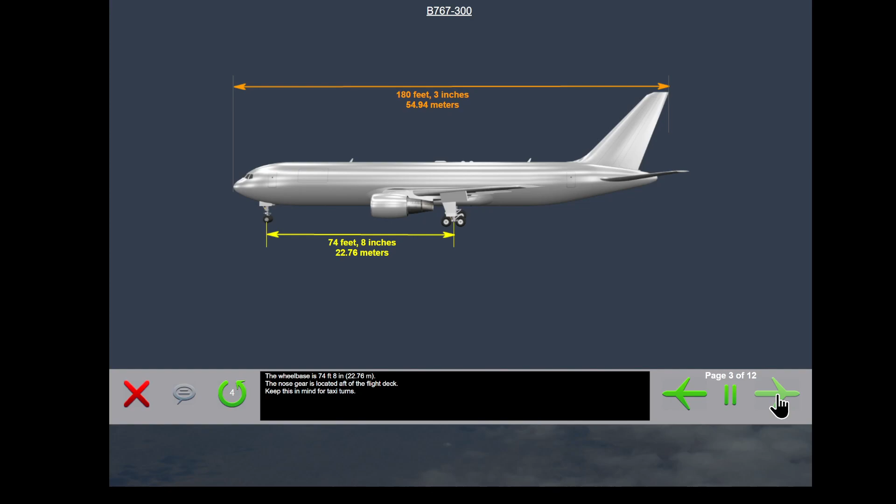In this module, we describe the principal dimensions and turning radius of the Boeing 767-300. The wheelbase is 74 feet 8 inches or 22.76 meters. The nose gear is located aft of the flight deck. Keep this in mind for taxi turns.

The span of the horizontal stabilizer is 61 feet 1 inch or 18.62 meters. The distance from the ground to the top of the vertical stabilizer is 52 feet or 15.85 meters. The distance between the main gear struts is 30 feet 6 inches or 9.30 meters.

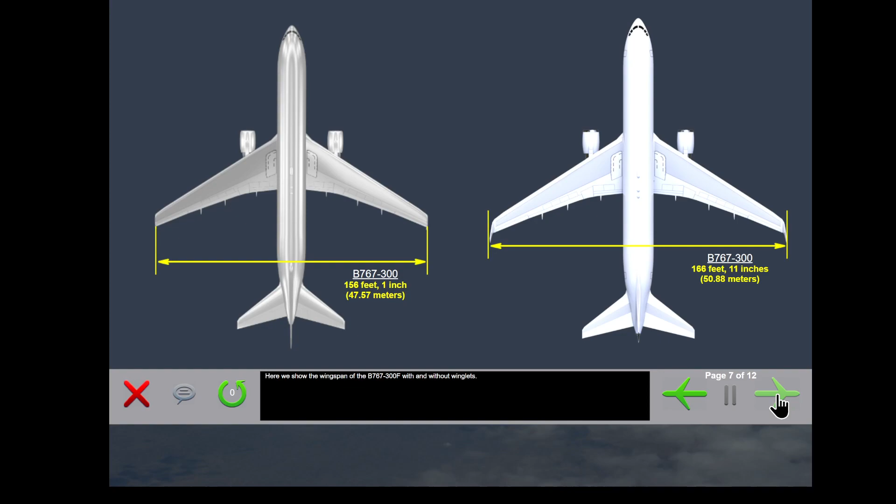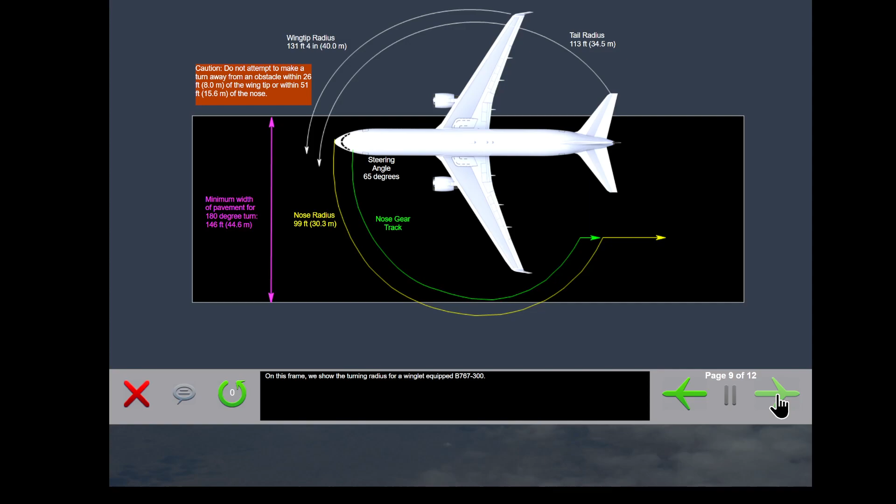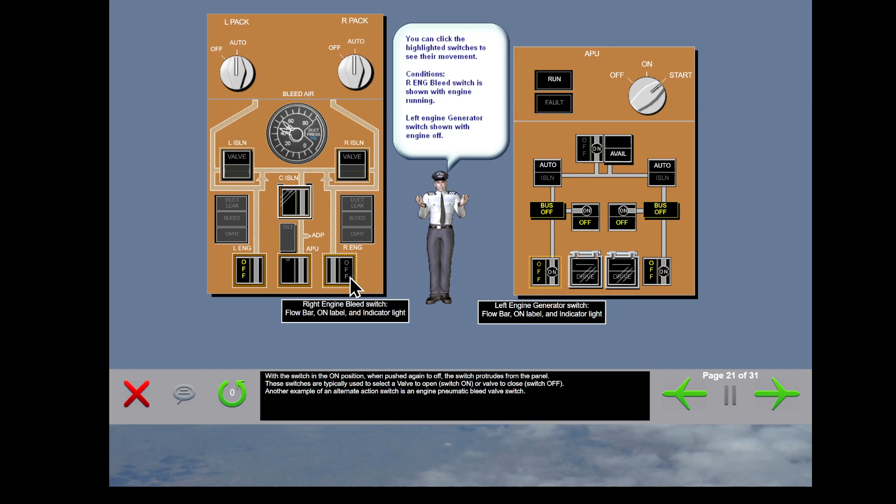Notice that when in the on position, the switch is flush with the panel, an illuminated flow bar is displayed, and the off light remains illuminated until the valve actually opens, with the engine pneumatic pressure opening the valve. Other system alternate action switches have an on designation superimposed on the flow bar associated with the on position. Examples of these kinds of switches are the fuel pump switches.

Finally, other alternate action switches simply indicate on and are not equipped with the shutter and flow bar. An example of that type of switch is an anti-collision light switch. The lower part of the switch contains a line signifying that there is no label for that part of the switch.

This type of switch is spring-loaded to the extended position. When pushed to the on or off position, this switch returns to the extended position. An example of a momentary action switch is the external power switch. We'll explain. The external power switch is currently shown in the off position. The available light merely indicates that external power of the correct voltage and frequency is connected to the airplane, but not currently in use.

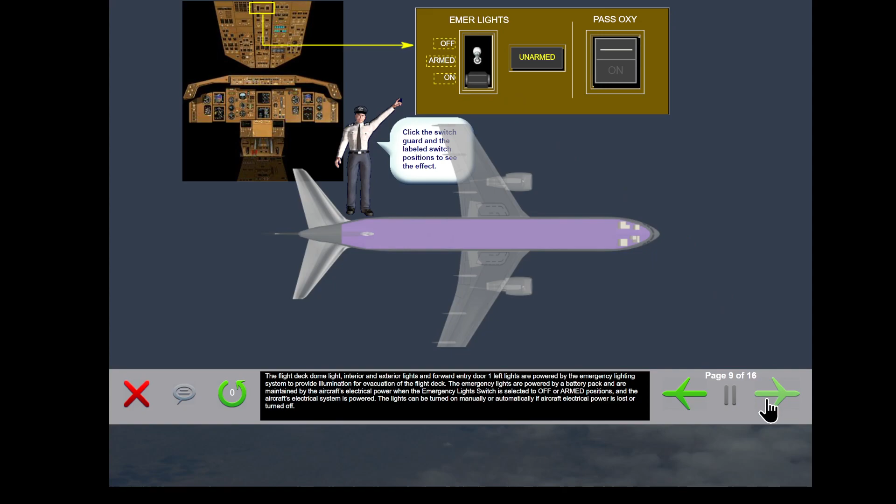With the switch in the armed position, all emergency exit lights illuminate if normal electrical power fails or is turned off. The switch on position activates the lights without any electrical power loss, but turns on the emergency lights unarmed light. A corresponding EICAS advisory message of emergency lights is generated as well. Selecting the switch to off prevents emergency lights operation. Again, the unarmed light illuminates.

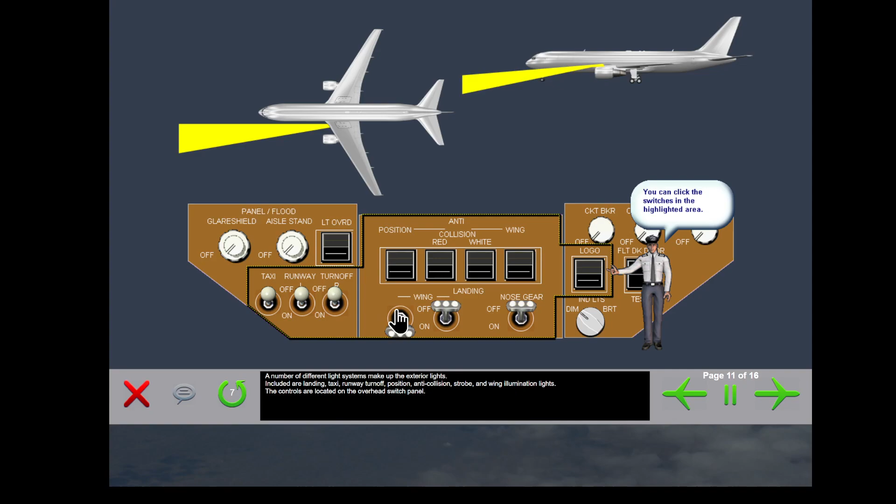A number of different light systems make up the exterior lights. Included are landing, taxi, runway turnoff, position, anti-collision, strobe, and wing illumination lights. The controls are located on the overhead switch panel.

You can turn the lights on and off by use of this free play panel. The wing landing light intensity is at maximum only when the landing gear lever is in the down position. The nose gear landing lights and the taxi lights work only when the nose gear is down and locked.

This module describes the operation of the Boeing 767 cabin doors and emergency exits. All passenger entry doors operate the same. They're manually operated and can be opened from inside or outside of the airplane. The passenger entry doors are plug type and during opening will first move inward and then upward into the ceiling. The doors are counterbalanced, so less effort is necessary than you would expect for operation.

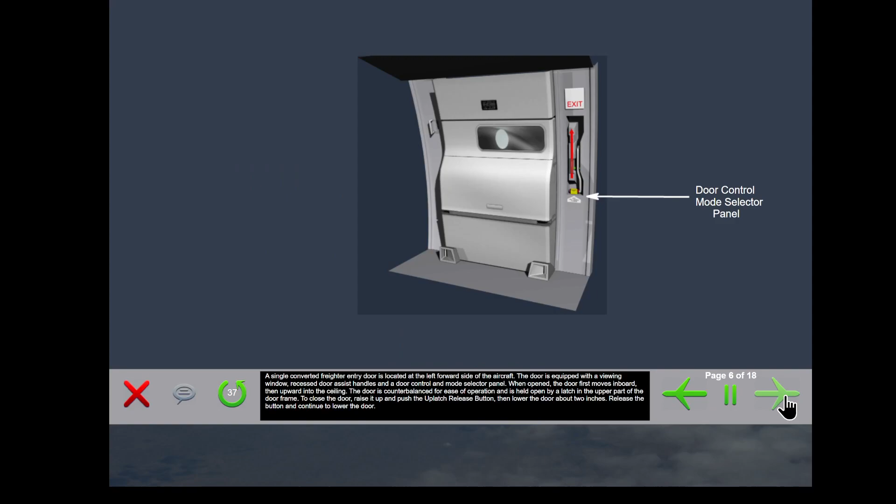A single converted freighter entry door is located at the left forward side of the aircraft. The door is equipped with a viewing window, recessed door assist handles, and a door control and mode selector panel. When opened, the door first moves inboard, then upward into the ceiling. The door is counterbalanced for ease of operation and is held open by a latch in the upper part of the door frame. To close the door, raise it up and push the uplatch release button, then lower the door about 2 inches. Release the button and continue to lower the door.

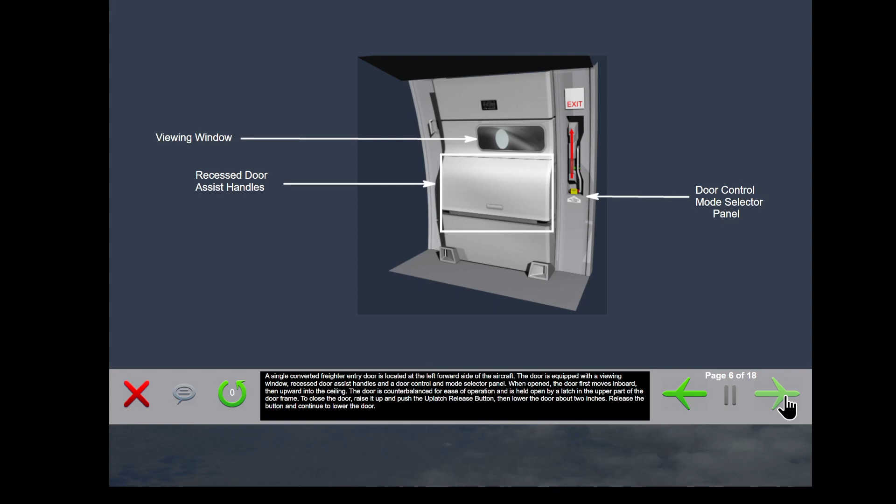We now show the door controls and will demonstrate the operation of normal door opening from the inside. Here you can see that the door is armed for emergency operation, so we must disarm it before opening, or the slide will automatically deploy and inflate. You can determine a door is armed by observing the yellow armed indicators, the position of the slide arming lever, and the displayed emergency-only armed indicator.

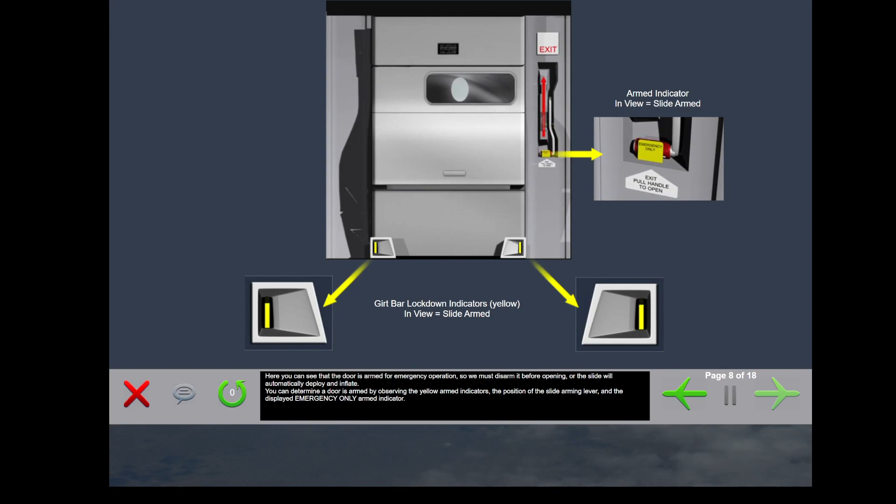The converted cargo freighter door is not equipped with a slide raft. An escape rope, installed over the center portion of the upper door frame, provides a means of egress from the main deck cargo area. The escape rope is used in the same way as the flight deck window emergency egress system.

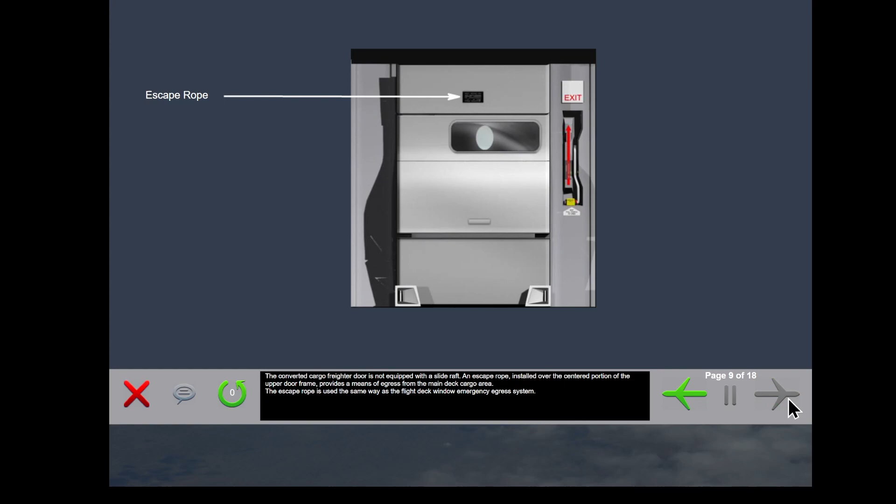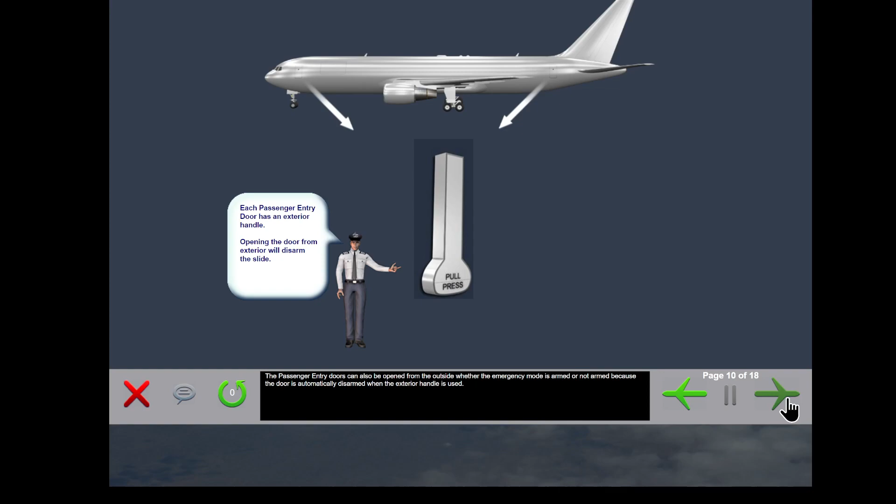The passenger entry doors can also be opened from the outside, whether the emergency mode is armed or not armed, because the door is automatically disarmed when the exterior handle is used. Pushing the exterior control handle in will disarm the door, then pulling the handle out unlocks and unseats the door. From this point, you can lift the door upward until it is held up by the door open latch.

Main cargo compartment access is through a main cargo door located on the left side of the aircraft, forward of the wing. The door is controlled electrically and is powered by the ground handling bus. The main deck cargo door opens outward and is hinged at the top and latches and locks on the bottom and sides by mid-span latches. Cargo loading lights are installed and operated by a switch on the main cargo door control panel.

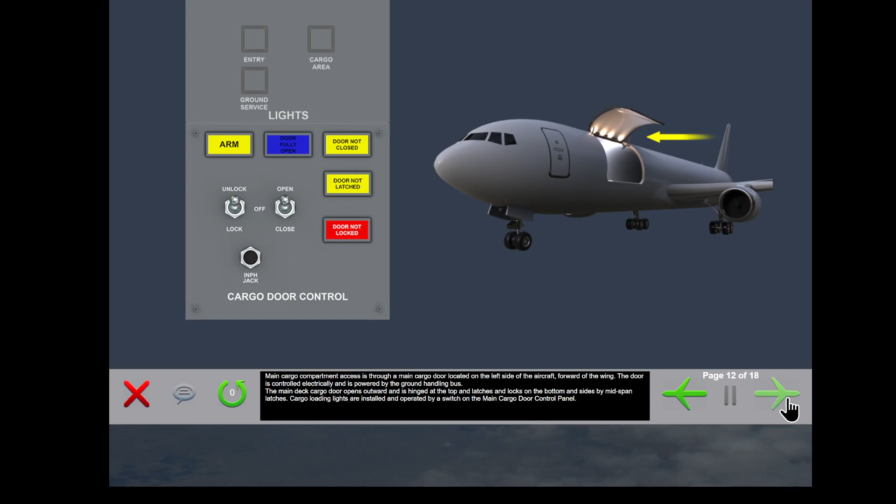Operation of the main deck cargo door is accomplished on the main deck cargo control panel. To open the door, pull and hold the lock-unlock switch to the unlock position until the arm and door not latched lights illuminate. When both lights illuminate, release the switch. Then pull and hold the open-close switch in the open position until the door fully open light illuminates. To close the door, pull and hold the open-close switch in the closed position until the door fully open, door not closed, and door not latched lights extinguish. Release the switch.

There are 3 lower cargo doors, one forward, one aft, and one bulk. The forward and aft cargo doors are located on the right side of the aircraft, while the bulk cargo door is located on the left side of the aircraft. The forward and aft cargo doors are operated electrically and open upward and outward. These doors may be operated manually as well. The bulk cargo door is an inward opening door and can only be operated manually.